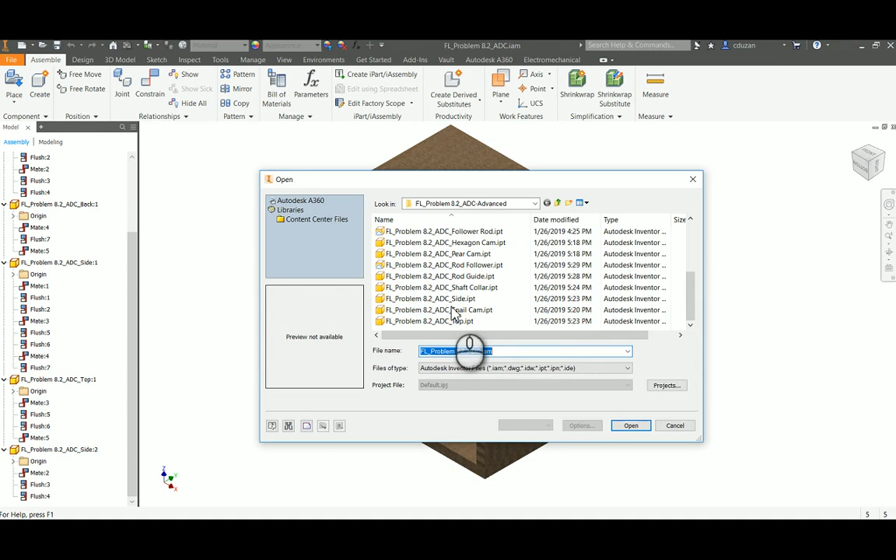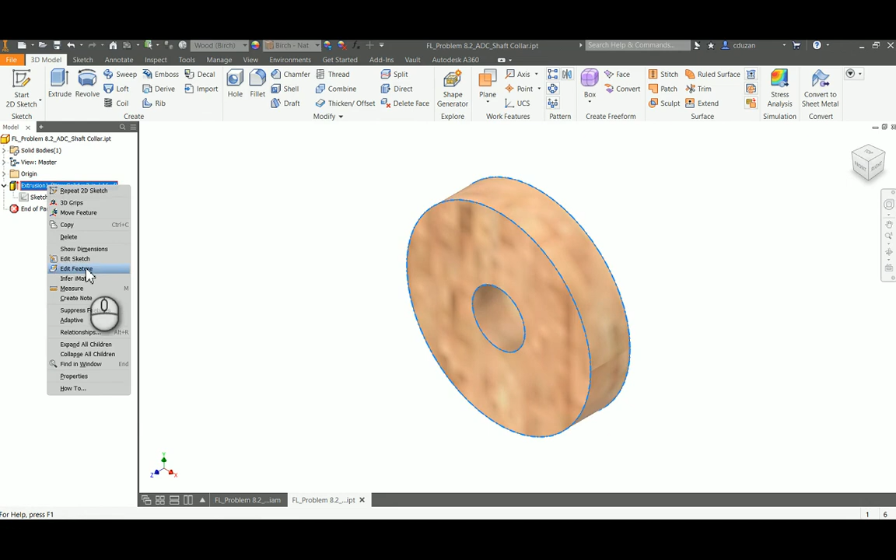So I'm going to go ahead and create the shaft collars first, or at least show you what those are going to look like. And they would look a lot like this. You can take a look at the sketch on this one. Looks like I created an outside diameter of 0.875. The inside diameter is 1/4, and that's going to allow the 1/4 inch round dowel rod to go through it. And the extrusion on that one would be a distance of 3/16, and then I just made that wood birch. That's all that shaft collar is going to be. So this time we're going to have to remember that calculation of 3/16.

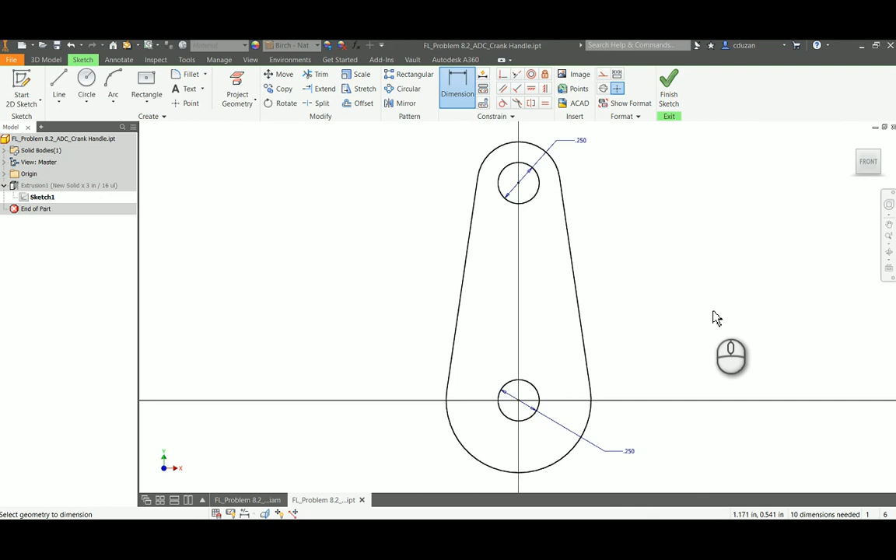And this time I want a true crank handle. So I'm going to take a look. Here's just one that I put together. If I take a look at the sketch on this one, we're going to see that these have a diameter of 0.25. We're going to use the 0.25 round dowel, obviously, for the axle. And then in this case, it's going to be the little peg that's going to go into the end, which is actually going to be part of the handle. What did I make this? Center point to center point, 1.3-ish, it looks like.

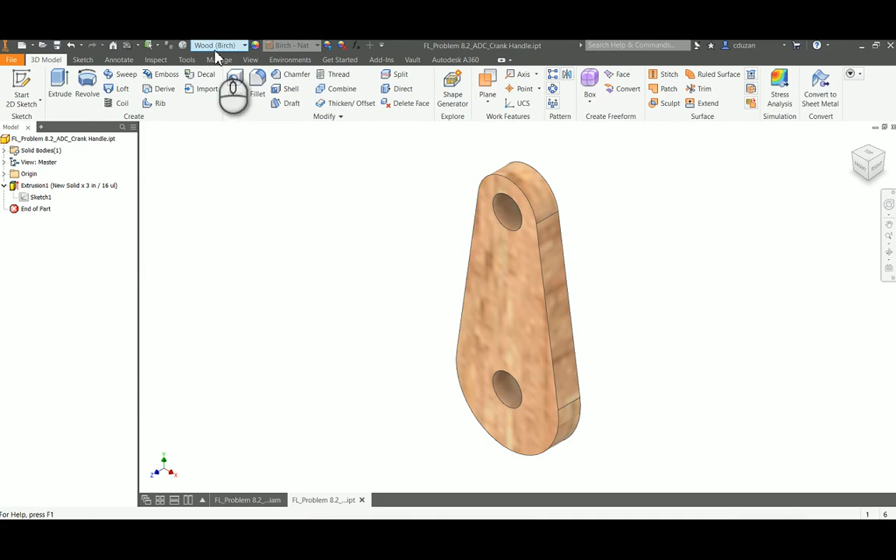Let's see. The outside on this is almost 1/2 inch diameter, and then this one, roughly 0.4 something on a diameter. Doesn't matter, I think I just eyeballed all this. Just know when I went to extrude, that was an extrusion of 3/16 in this case. Put that in as wood birch, okay, and I went out there and I just saved that IPT.

All right, so what this means for us is that we're going to have a shaft collar on both sides of this, okay, and we're going to have that crank handle on the other side of the shaft collar. All right, so we have to do a little bit of math here. We're going to come up here and measure this. Okay, we know that this distance is 5 inches.

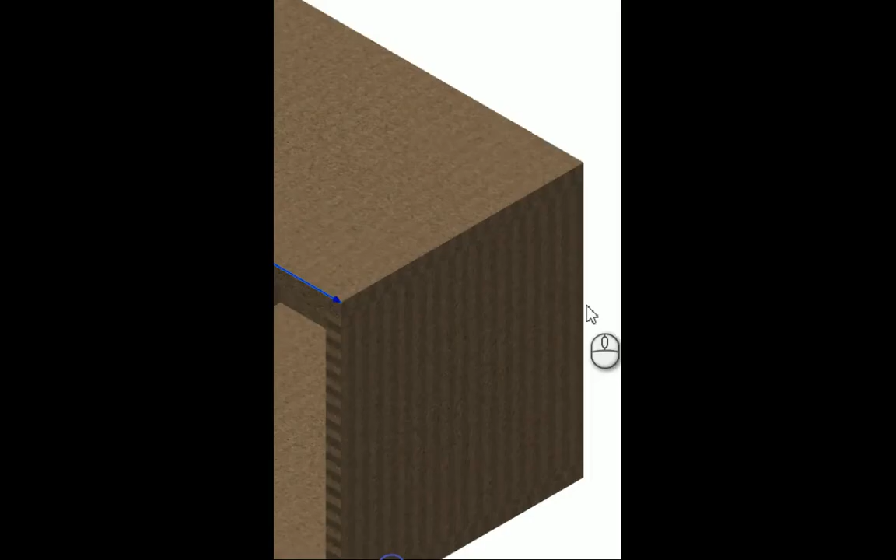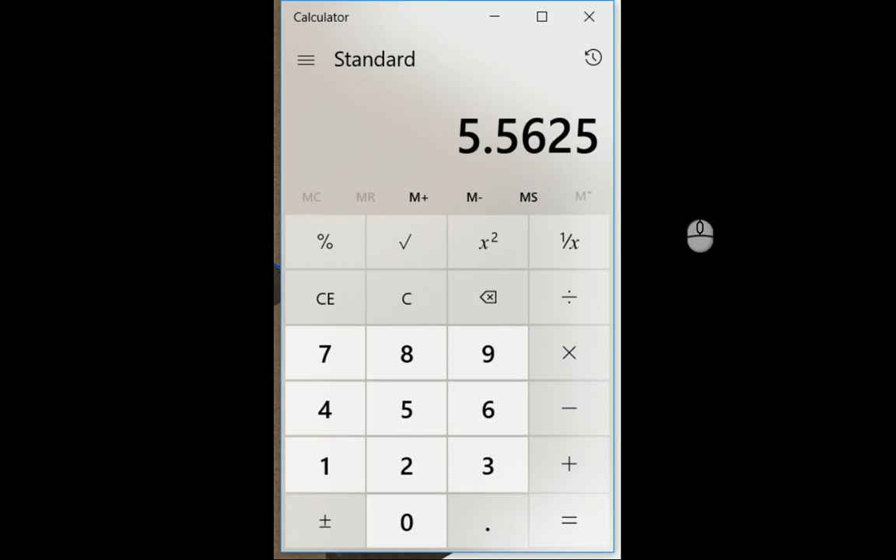We can go ahead and pull up the calculator and say, hey, what's this going to be? We're going to add that 0.1875 to it, another 0.1875 to it, and another 0.1875 to it. And we know that our axle has to be 5.5625. All right, I'm just writing that down because I'm going to forget it. So what that means for us is we have to go out there and create a new axle.

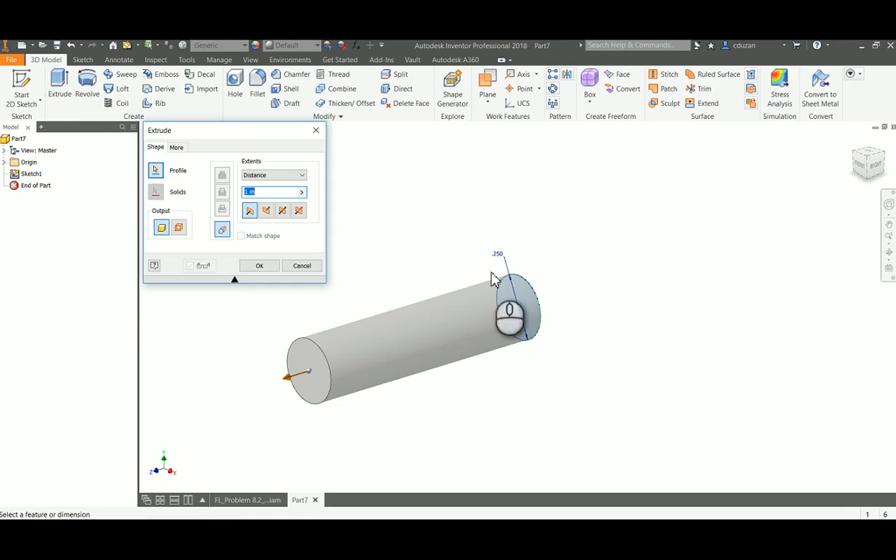So I'm going to come up here, go to my standard inch IPT and say create, start a 2D sketch, work on a work plane, draw your circle starting from the origin, and we're going to dimension that to be 0.25 for my diameter. I'm going to finish the sketch, do an extrusion, and if my math is correct, it should be 5.5625.

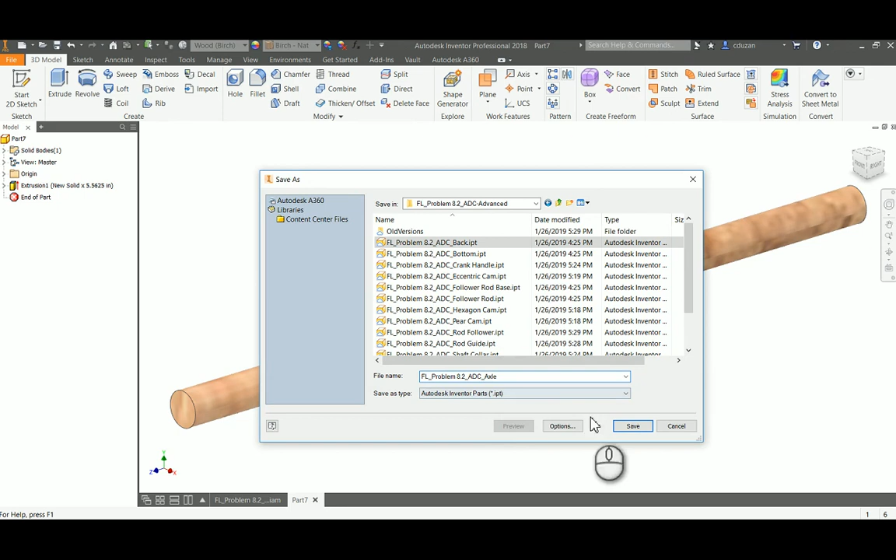Okay, now I can come up here and say, hey, I'd like for this to be wood birch. That's what dowel rod kind of looks like. And I'm going to go ahead and do a save, and I'm going to call this one my axle. All right, so I got that one saved. That is done.

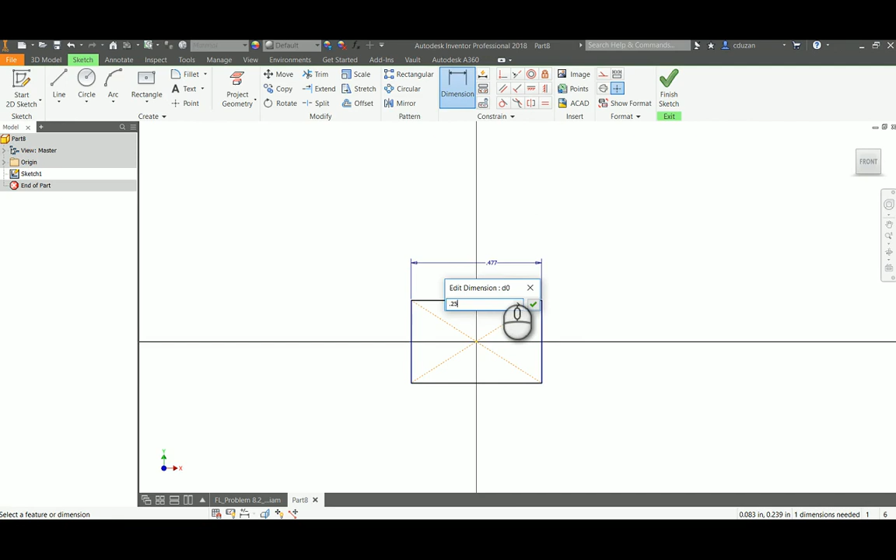All right, so my follower rods, in this case, are going to be the square dowels. So I'm going to have to come out here and create a new IPT. I'm going to start a 2D sketch, go to the work plane I want to work on, use 2-point center this time, go to dimension, and we're going to make this 0.25 by 0.25, and finish the sketch.

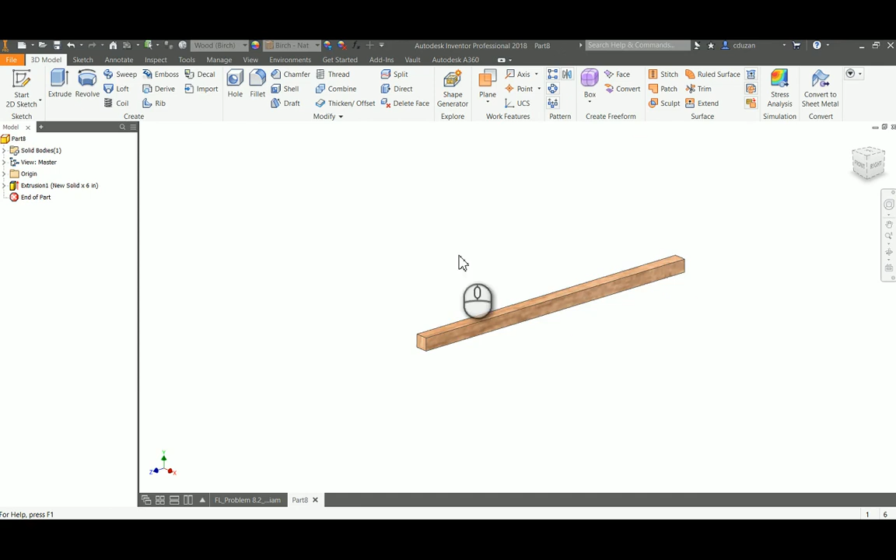We're going to do an extrude, and I said last time those were 6 inches in length. We'll go ahead and just go with that, and we'll turn this to wood birch, just like so. I'm going to do a save as, and this time, this is going to be my follower. Okay, so I have my follower rod saved.

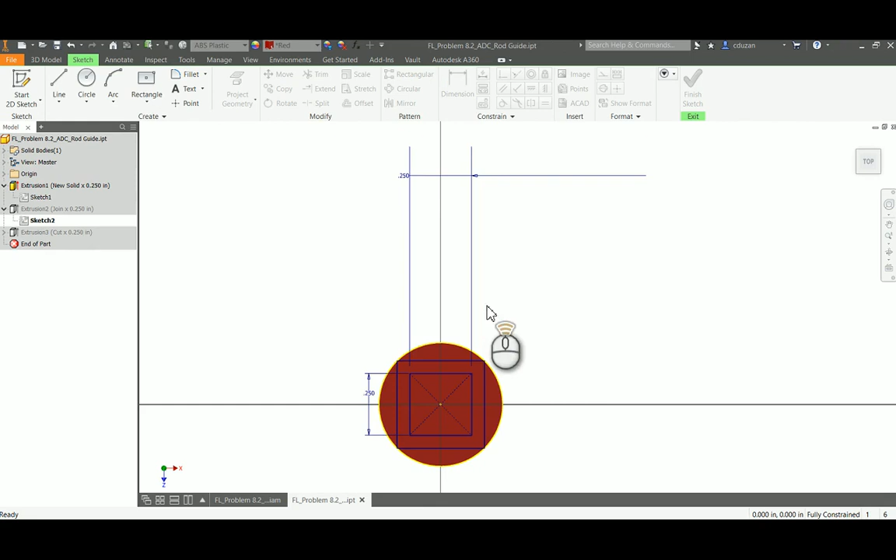So if you kind of think about it, like I said before, we're going to have to make some sort of a bushing, and we're going to call this the follower rod guide. I'm just going to show you real quick what that looks like. Where is my rod guide? There it is. Here's something I just put together. Simple cylinder, and we have this square on the inside. If we take a look at this extrusion at the top, that square is 0.25 by 0.25, and that's cut all the way down through.

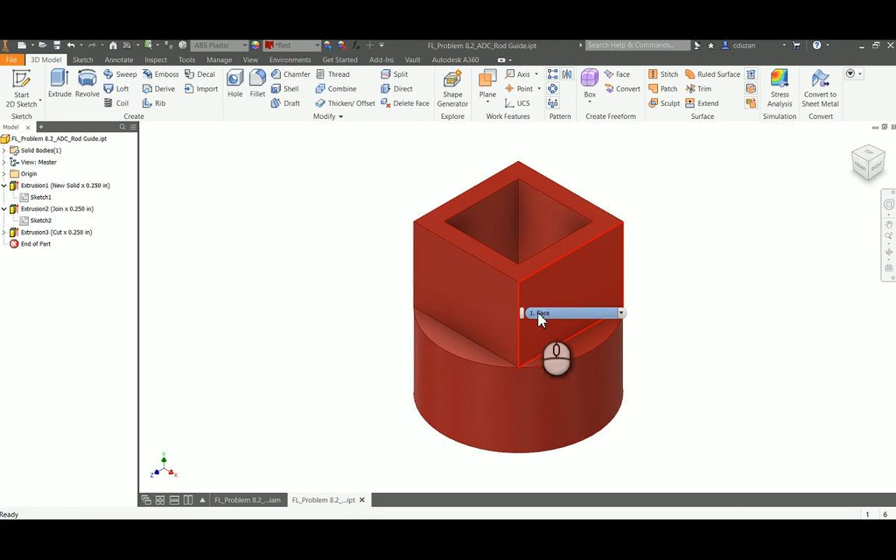The biggest thing we have to know is what this diameter is. If we take a look at this sketch, in this case it's a 1/2 inch diameter. I need to know that because I have to drill holes in the top part that are going to be this diameter, which is 0.5. Just wanted you to be able to see it. This is easily something that can be 3D printed. In this session, you're probably going to be getting these. Very simple part. You can 3D print a bunch of those.

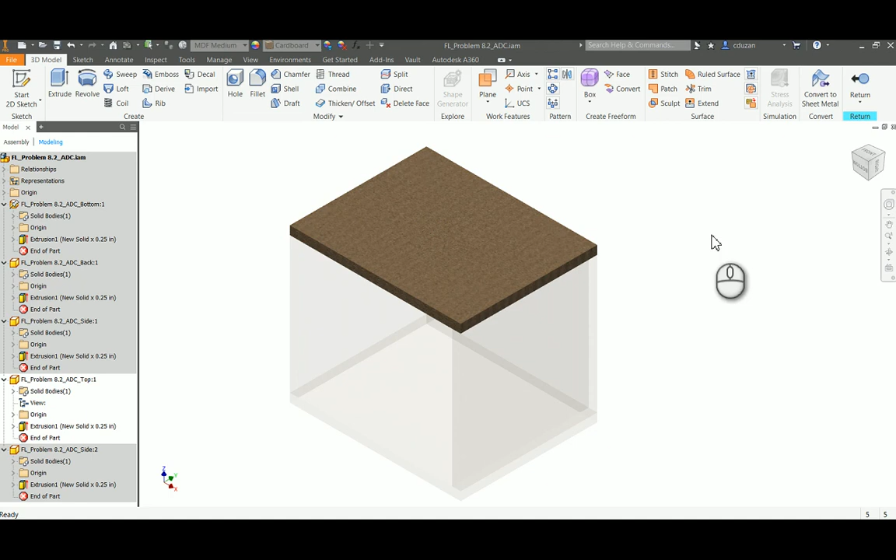Okay, so I think we are basically ready. This time I'm going to work directly through the IAM to make any changes I need. I'm going to start a 2D sketch. Actually, no, this time we're going to do something a little bit different. Last time I was creating a sketch, dropping that point in there, telling it where it needed to go, and then I went to the hole feature.

But this time, let's just go directly through the hole feature. I'm going to go out there and pick on the surface of this, and come out here to my reference edge. Now, last time, we made these 1 1/4 inches from the sides. So I've established that, and I'm going to come over here to this reference edge and say I want that to be 2 inches.

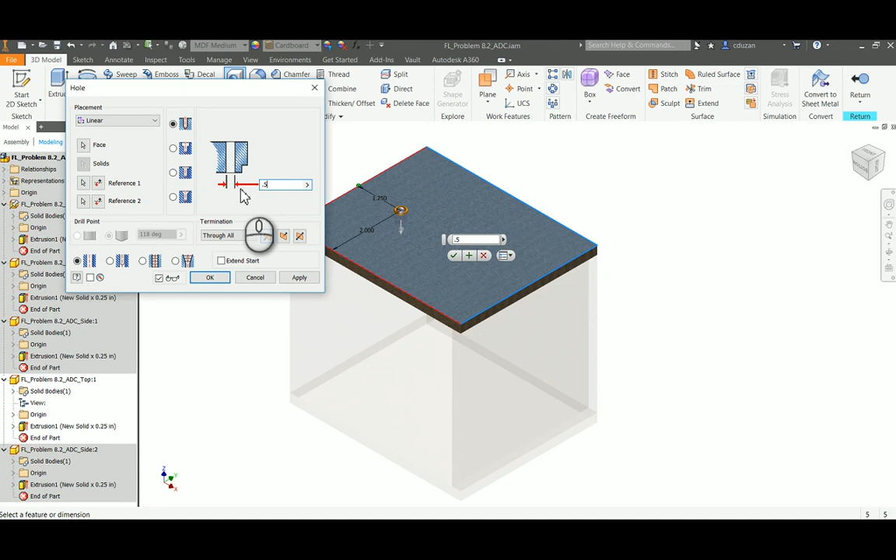In this case, I was just showing you that follower rod guide, which shows a 1/2 inch diameter for that cylindrical base on it. So I'm going to say I want this to be 0.5, and that's going to be a standard hole cut all the way through. I'll go ahead and say okay.

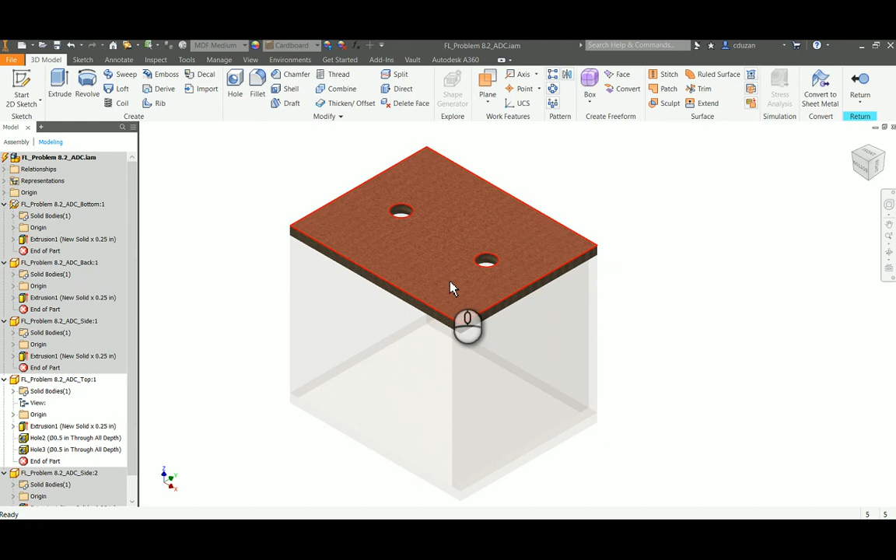I'm going to repeat the process again. Come out here, pick on the surface I want to go to, come to my first reference edge that is 2 inches away. My second reference edge is going to be this one, and that needs to be 1.25 away. Diameter 0.5, standard hole, cut all the way through, and I'll go ahead and say okay. So I've now taken care of the holes for the top IPT. I'm going to return back to my assembly.

Now I need to go ahead and get my hole drilled in here for the 1/4 inch diameter axle that's going to be running through this. So let's just take care of that. I'm going to double click on this side IPT, go to my hole feature, and place that hole.

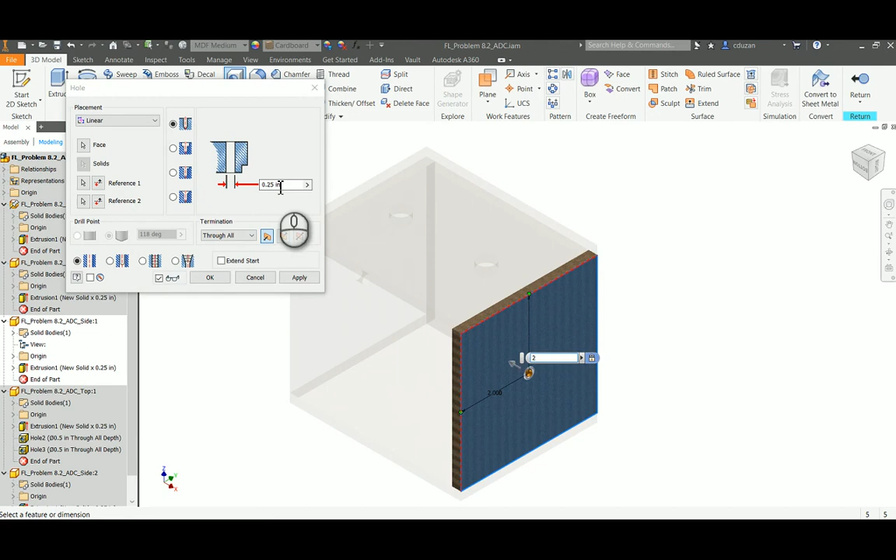I know my sides are 4x4, so I can go ahead and reference this edge, and that needs to be 2 inches. I can reference this edge, and that needs to be 2 inches. In this case, it's going to be a 1/4 inch diameter hole. Standard hole, drill all the way through, and I say okay.

I'm going to return back to the assembly. Nice thing is, since the side was a duplicate, any changes I make to one side IPT is going to be reflected on the other.

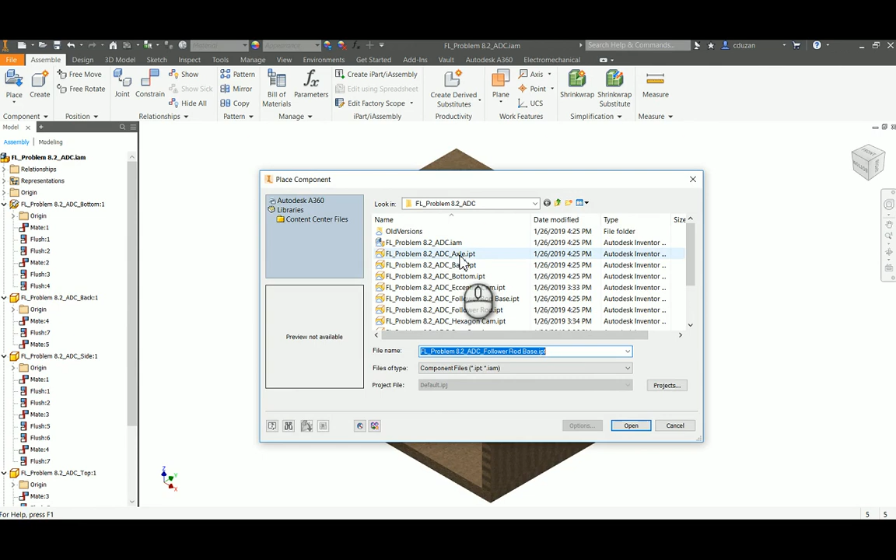So just like with our basic assembly we did a little bit ago, now I can go ahead and begin dropping in parts I'm going to need. I'm going to come out here and go to place, making sure I'm in the right place here - I had 2 different folders. All right, there's my new axle. I'm going to go ahead and place that in. We're only going to need one of those.

Let's see, we need some follower rods. Let's go out there and place in our follower rods. Okay, there's my first one and my second one. So I got that taken care of.

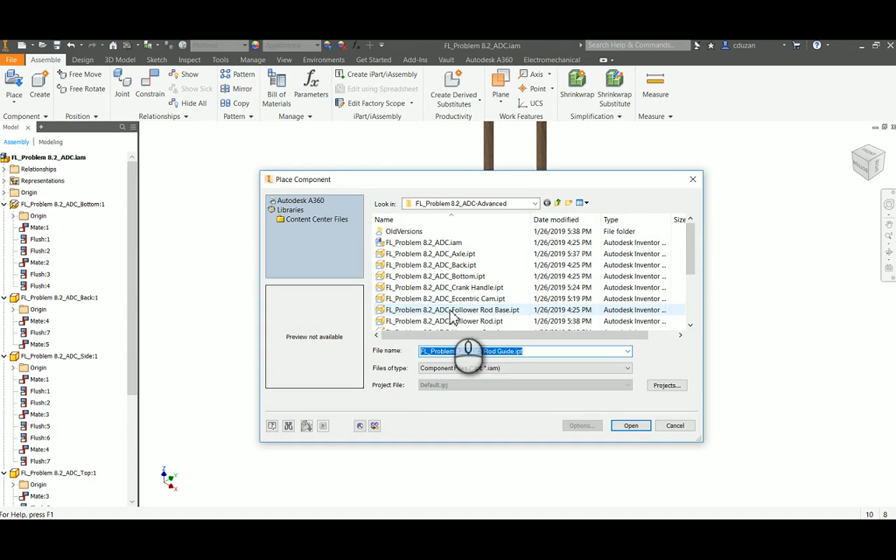And I know I am going to need my follower rod guide, which is what I was just showing you a little bit ago - these are just those bushings. And I know I'm going to need 2 shaft collars, which I was showing you a little bit ago. And I know I'm also going to need my crank handle. All right, so everything's starting to be placed.

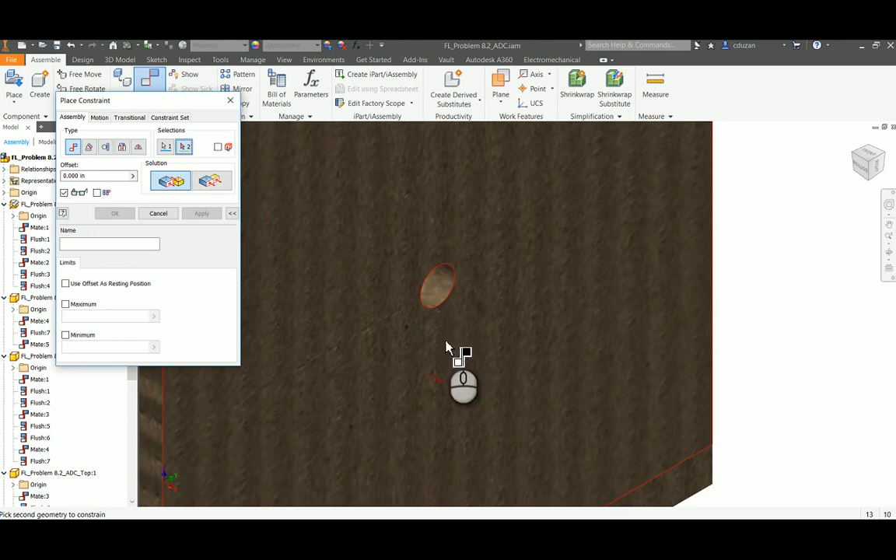All right, so simple enough. Let's get our axle in. So we come out here to constrain, and we're going to use the mate type of constraint. We'll use the mate solution, come out here and find the axis that runs through that round dowel. Now we're going to go to the inside of this hole and find that connection between the 2 axes. When we do that, we'll see that this thing is able to slide through this, going both ways.

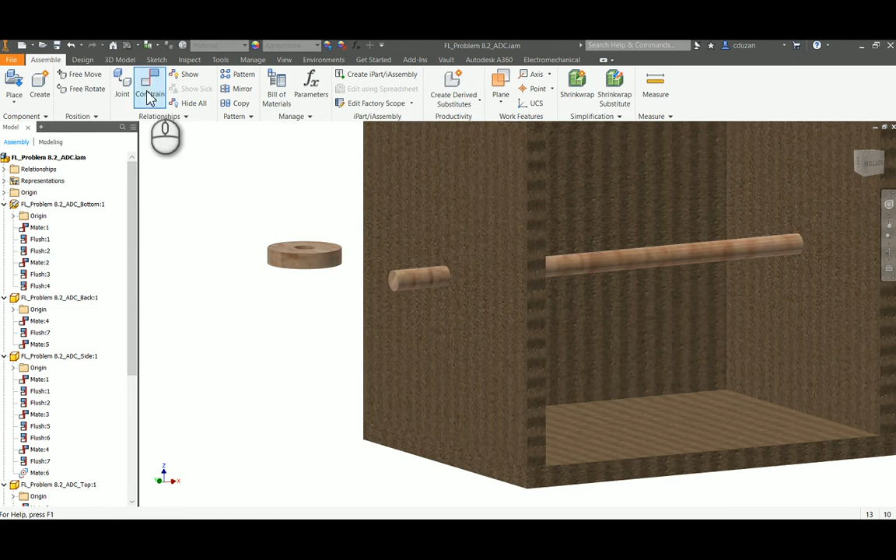Now I need to add my shaft collar on this side. Let's flip it over this way - I'm right-handed, so I want to crank it with my right hand. Here we go. So we're going to say constrain, and this time let's switch it up. Let's go out to insert constraint - we'd like to insert this edge here and make contact with this edge here. If it does not look right, just know you have your solutions. The first solution we are currently using is opposed.

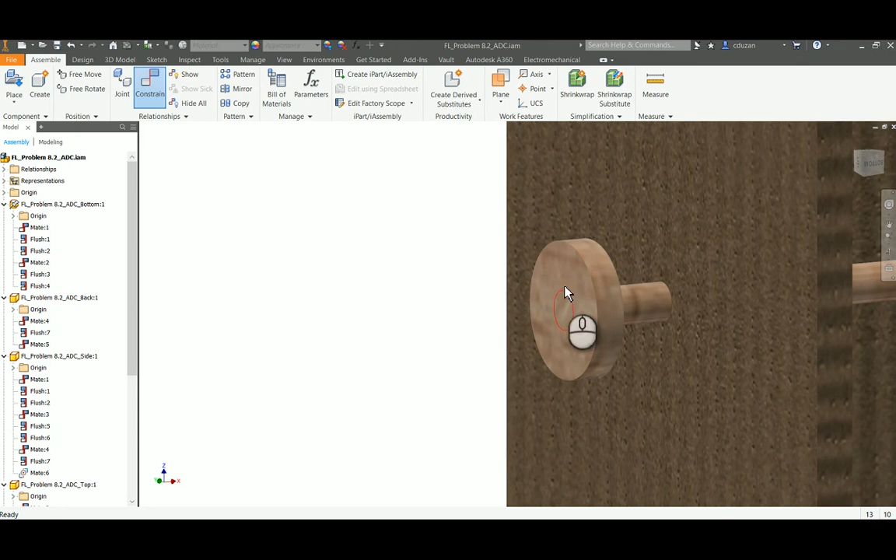If it doesn't look right, simply go to aligned and hit apply. Now we're going to be seeing that those two are working just fine together. Now, the problem we're going to have is that this is spinning independently from the axle.

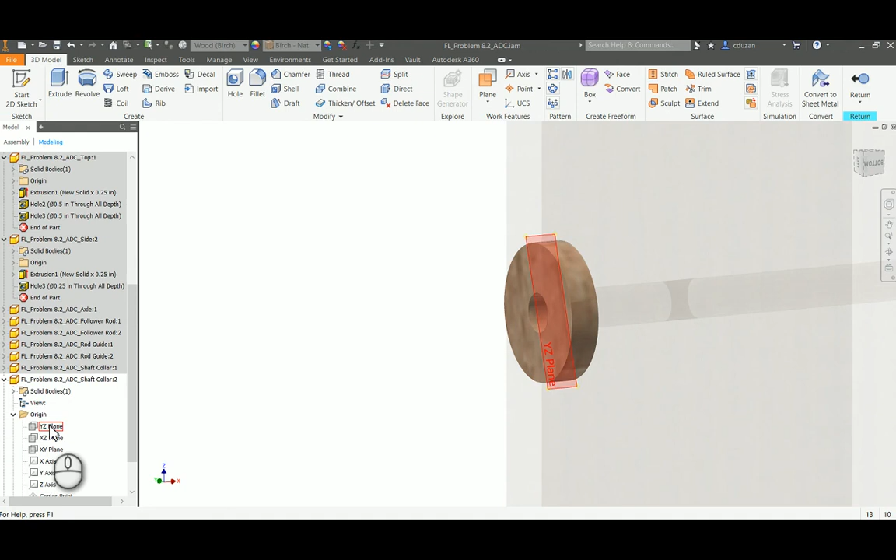So now this is going to take a little bit of work, turning on some work planes that we can use to constrain those. I'm going to double click on the shaft collar, go into my origin folder, and find a shaft collar work plane that I can work with. This one would work just fine. I'll pick on visibility to turn that on and return back to the assembly.

Now I'm going to double click on the axle and go underneath the origin folder for the axle to find a plane running the long way down the axle. This one works great. I'll turn the visibility on and once again return back to the assembly.

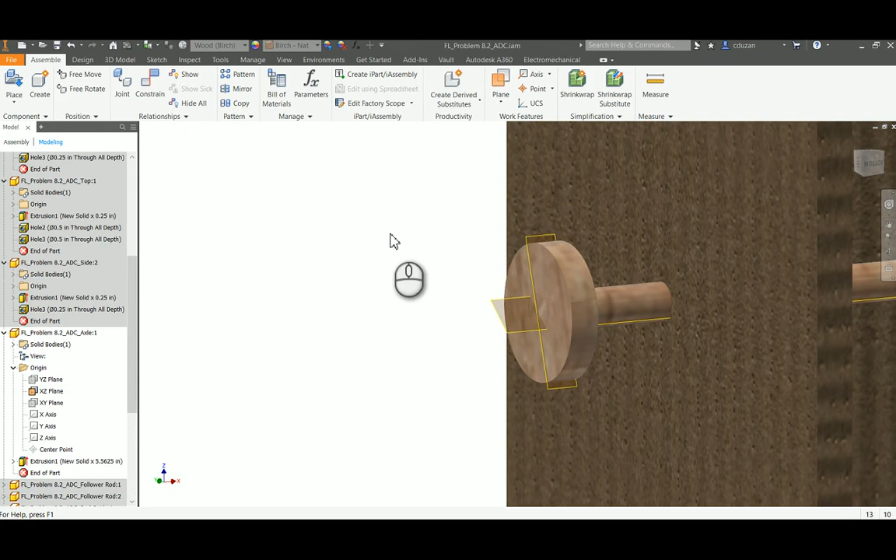Since I want these work planes to be working together, I'm going to go to constrain and use either mate or flush. It doesn't matter. If I pick one work plane and then the other, you'll see how those align. I'll go ahead and hit apply and cancel. Now when I spin this, you can see how those are working together.

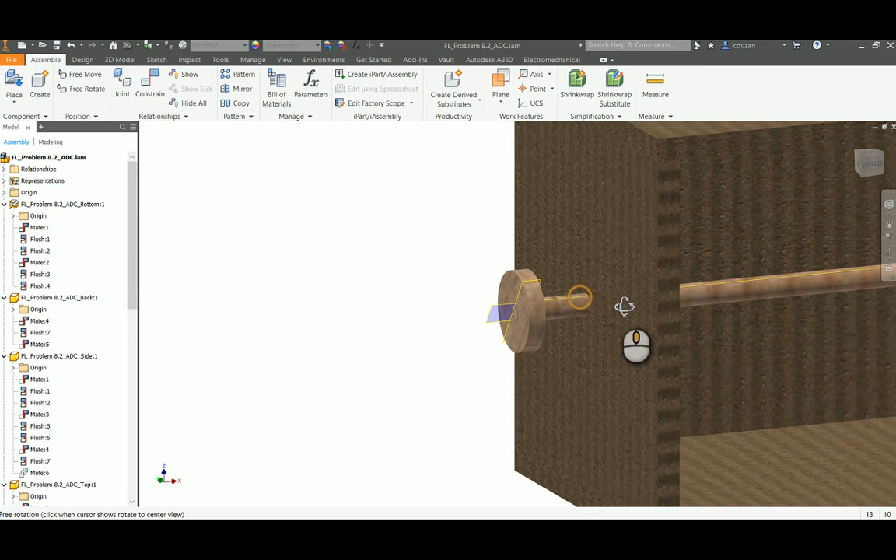But the thing is, I need this to come all the way to this surface. So that's going to be using constrain and mate. I'm going to pick the back face of our shaft collar and say I want that to make contact with this surface here. I'll hit apply and cancel. So this guy is not able to move off of here, and it is able to spin on that axis. We're looking pretty good.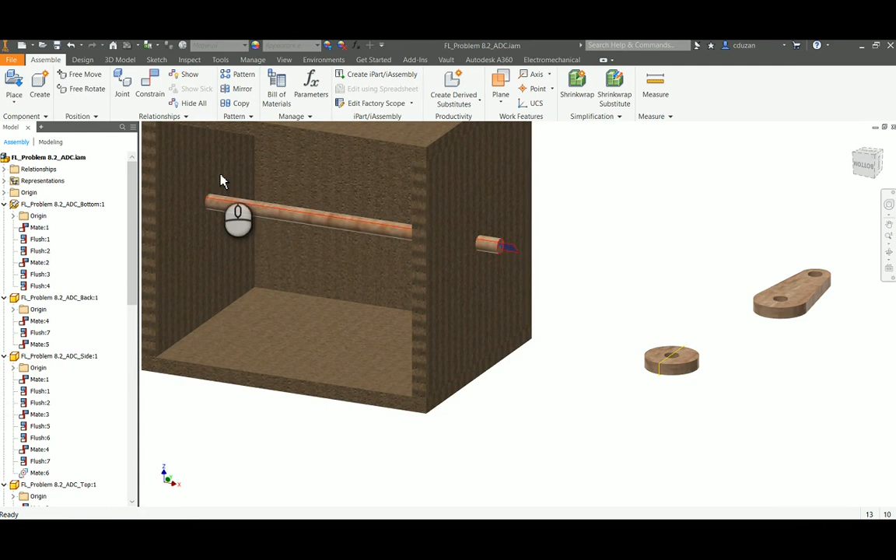I do want my shaft collar to come on over here, so I'm going to do a constrain, an insert in this case, and say I want this face here, that edge, to make contact with this edge. I can check the solution - oh, that's not right at all, so I want this to be opposed in this case. I'll go ahead and hit apply. Just like last time, we can see how the shaft collar is working independently from the axle.

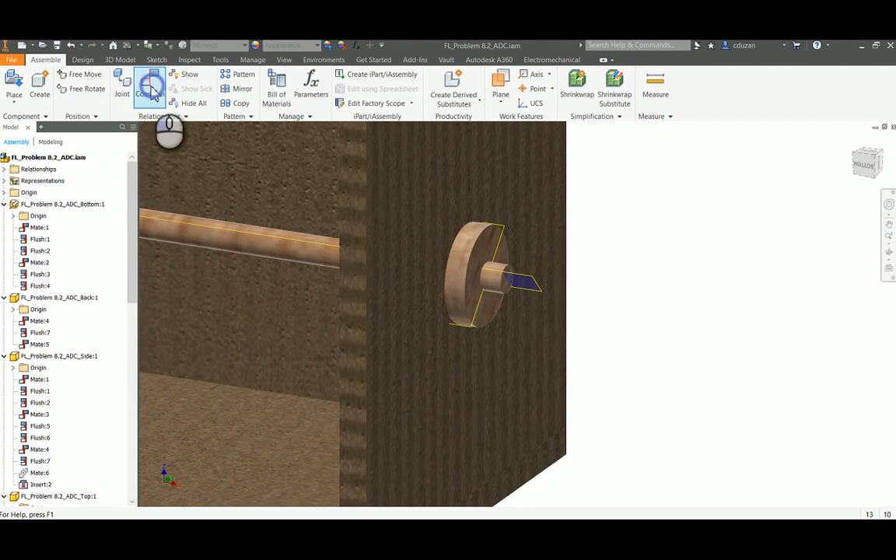So in this case, constrain, we're going to do either a mate or a flush, it doesn't matter. Go ahead and hit apply. Now we're going to see that these are working together and spinning in the same direction together.

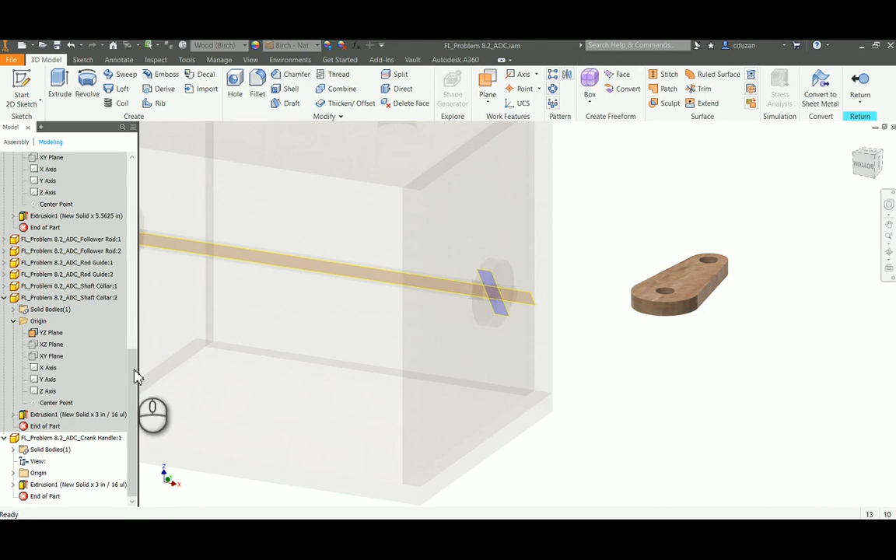So I have my crank handle - he needs to come on and join this party. Before I do this, I need a work plane that goes down through the center of this. So I'm going to double click on my crank handle, go to my origin folder, and find a plane that goes right through it, just like that. I'll turn the visibility on and return back to the assembly.

Now here's where I can come out and constrain this axis, using the mate constraint, mate solution, saying I want that axis to be working along with this axis. I'll go ahead and hit apply. Now I can see that this is working independently from the other one.

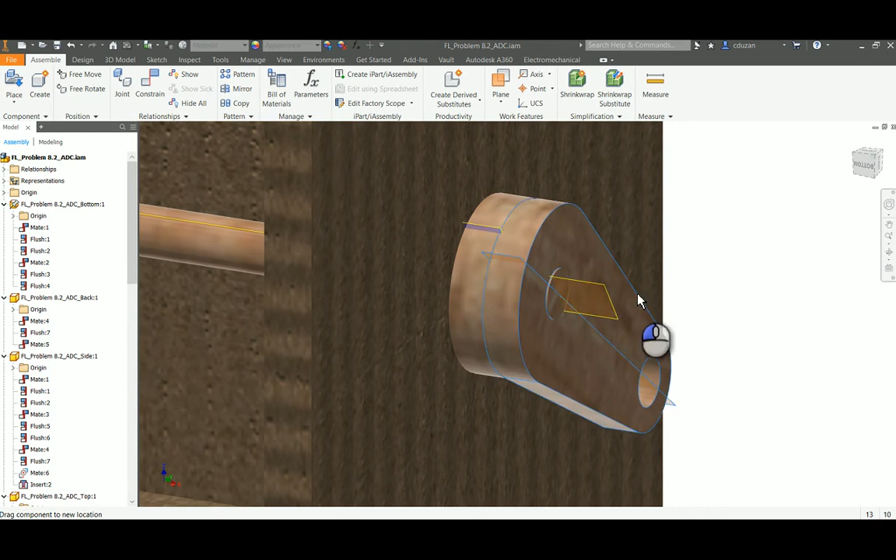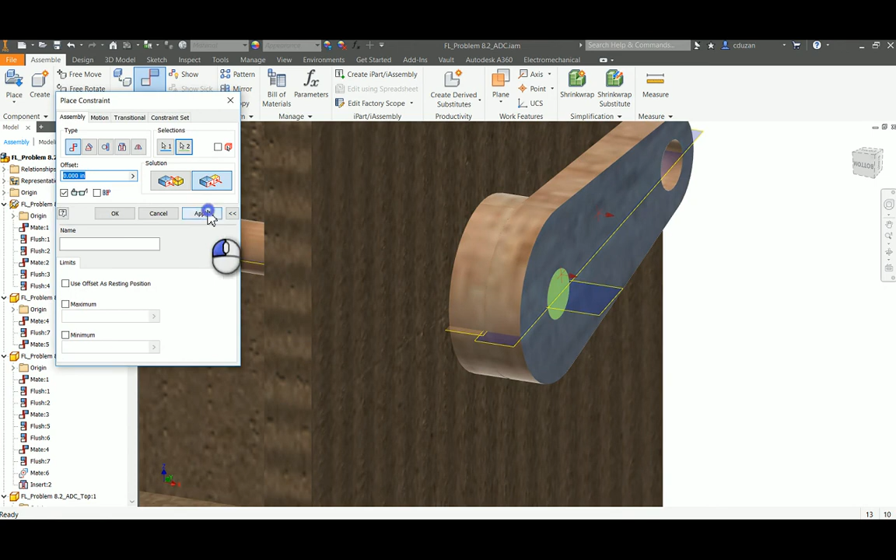So I can either do a mate or a flush - I'll say this plane and this plane need to be working together. I can see those are now working together. The problem is that this is sliding off, and my measurements are correct, I can already tell. So if I come out and do a flush between this face and this face, now I can see that's all one package, and that's going to work just great.

So I have my crank handle, my axle, everything is where it needs to be. It is able to rotate. We're doing pretty good.

Okay, so I need my follower rods to go down through these holes, but before that happens, I need to install these rod guides. All right, so let's see how we're going to do that. Let's go out to constrain.

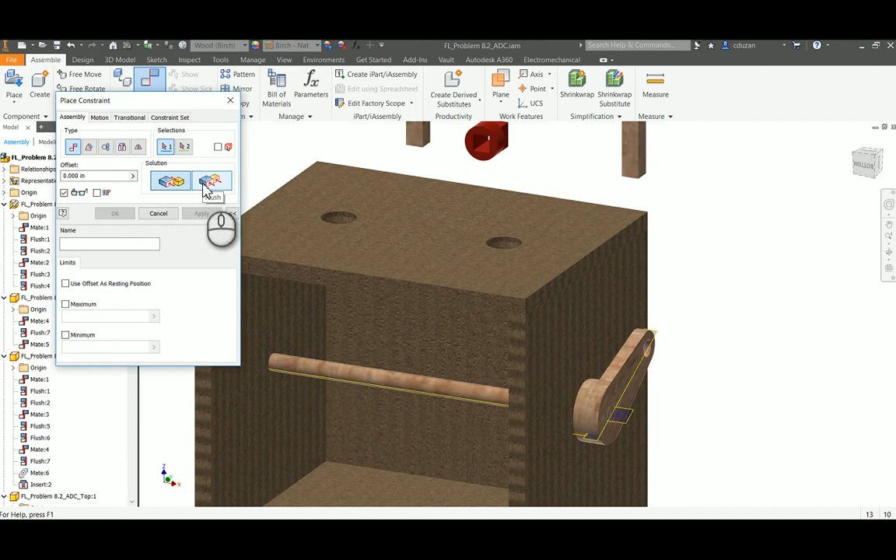Okay, we're going to be using the mate type of constraint with the mate solution. Come here to the outside of this rod guide. Okay, find that axis, and let's go ahead and pick to the inside of the hole. Okay, and yeah, that'll work just fine. Let's go ahead and hit apply and cancel out.

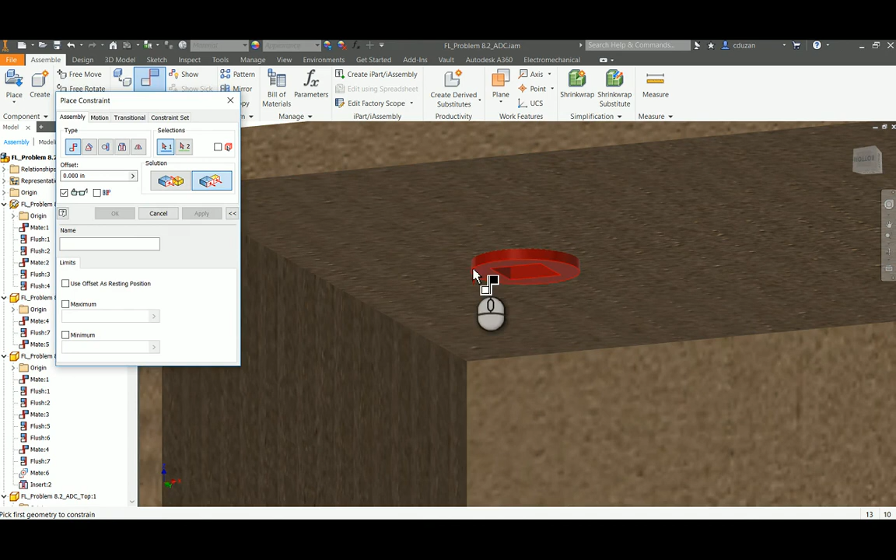The problem is that I want this guy to be down underneath. All right, so let's see if we can get this to work for us. It might get a little fussy. I'm going to go to constraint and say flush, and I want this face to be flush with this face. Okay, now that has gone on in. Now the problem is this is rotating. Okay, that is just fine. I'm going to show you something here in a little bit. We can get all those to align.

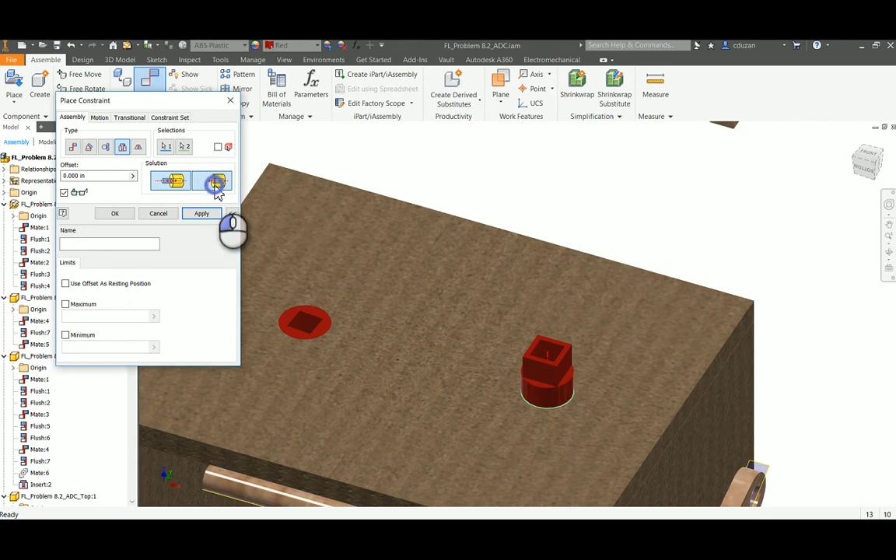That's just fine. Hey, for the second one, let's go ahead and let's try using insert. Let's go to constrain, let's go to insert, and we're going to say we want this to be inserted into here. And I don't like how that is looking, so if I just hit the second solution, which is aligned, and hit apply and OK, all right, this guy is going to do exactly what we just did last time. The nice thing is, the second time around, we actually cut out a step.

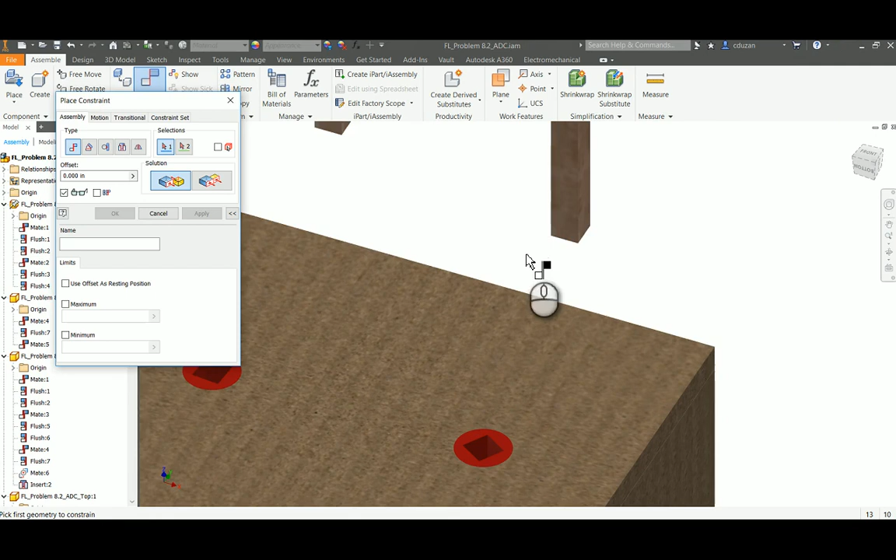All right. So we have those in. Now we need to go ahead and make sure that our follower rods are connected into those rod guides. So I'm going to go ahead and constrain this face to just one of these flat faces on the inside. Go ahead and hit apply. And since I have that one connected over on the other side, I'm going to flip this over if I can get to it. There we go.

And I'm going to say I want that to mate to this face here. Go ahead and hit apply. All right, so that fits just perfectly in. You can see that this is also going to be able to rotate. Okay, still not a problem because we'll fix that in just a little bit.

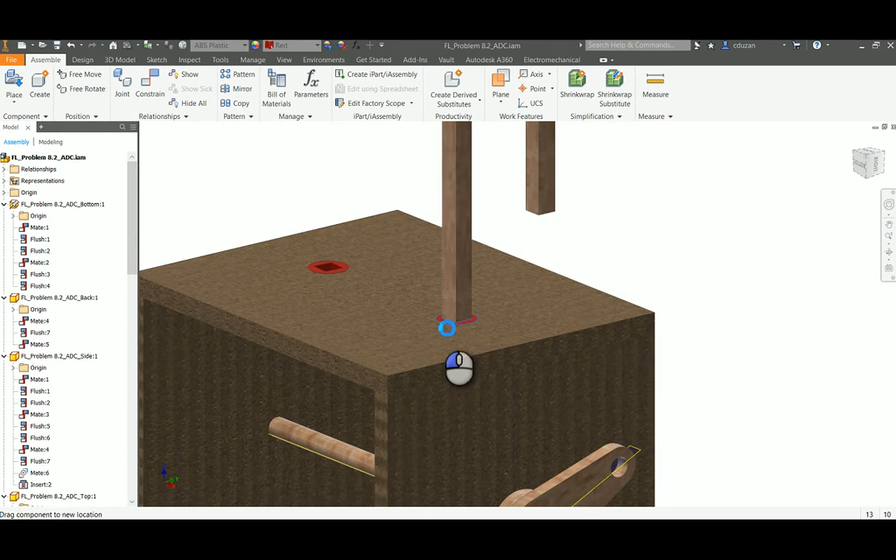I'm going to do the same exact thing I did before. I'm going to go ahead and constrain one of these faces to the inside of one of these faces. Hit apply. I can go ahead and scoot this on over. Now I can go ahead and take a look at this, and I can constrain this face to this face. Go ahead and hit apply, and now this is going to be able to go up and down. All right, so now we are ready for cams.

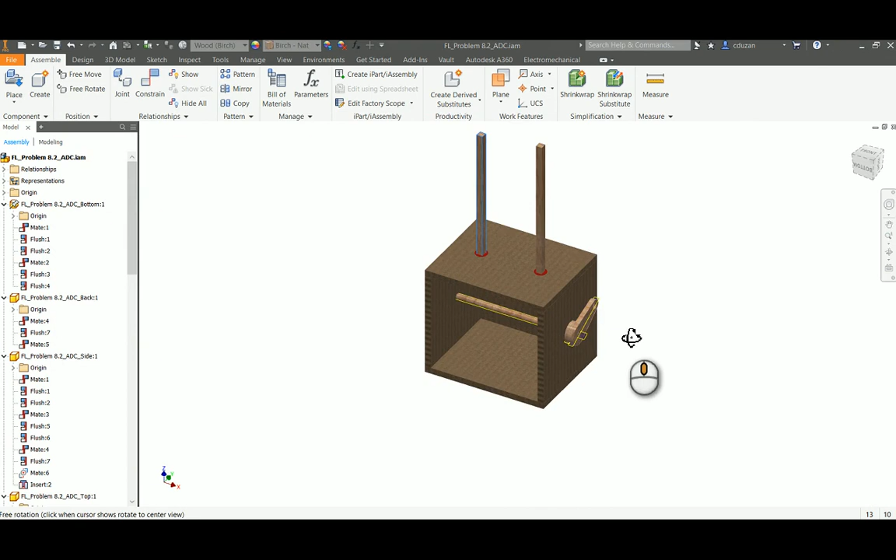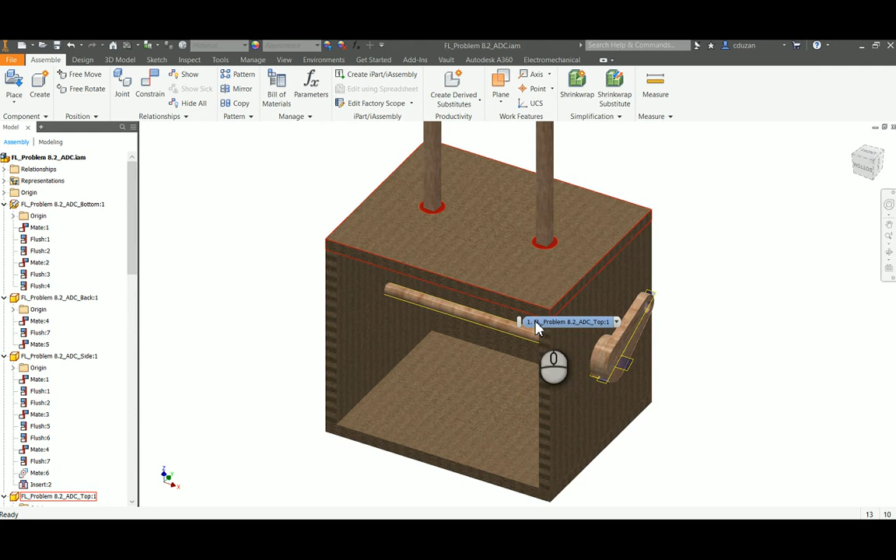All right, so just know at this point in time, this is one of the sessions before parametric constraints and equations with cam design. You're not going to have these ready to go yet. You actually are not going to have these built. So just know right here where you're seeing the video, down below, you're going to see a folder where you can download, a button where you can download the files that you're about ready to see.

In this case, the cams are going to look a little bit different than last time. Okay, remember the axle that we have is round, it is not square. All right, so I'm going to go out here and place we're going to use the eccentric cam just like last time. And we're going to also place, let's do a pear cam this time. Actually, I think it was a pear cam last time too, that's okay.

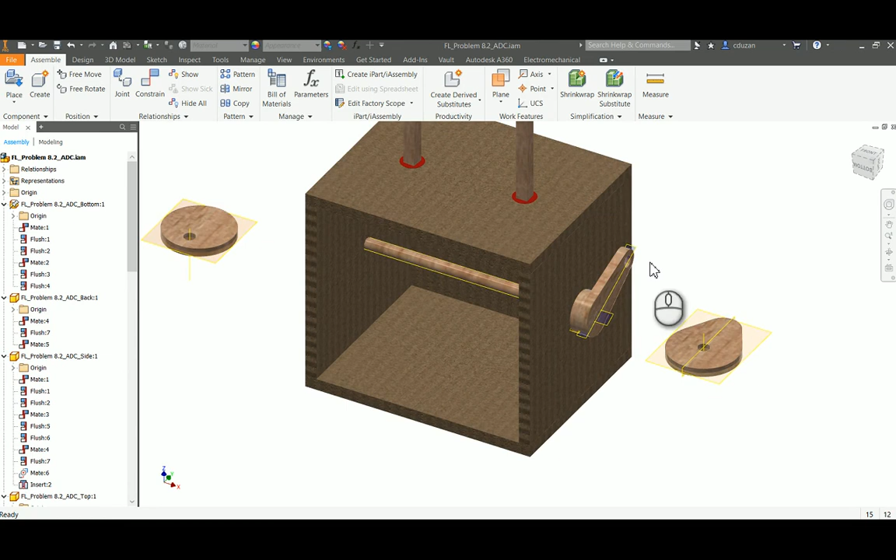All right, so let's go ahead now and let's constrain the axis of our arbor hole of our cam to the axis of our axle. Let's go ahead and hit apply, and we're going to see that this is able to slide back and forth.

Okay, so when the cams are created, and if you do this properly, we're going to see a work plane is going right down the center of that. Okay, and

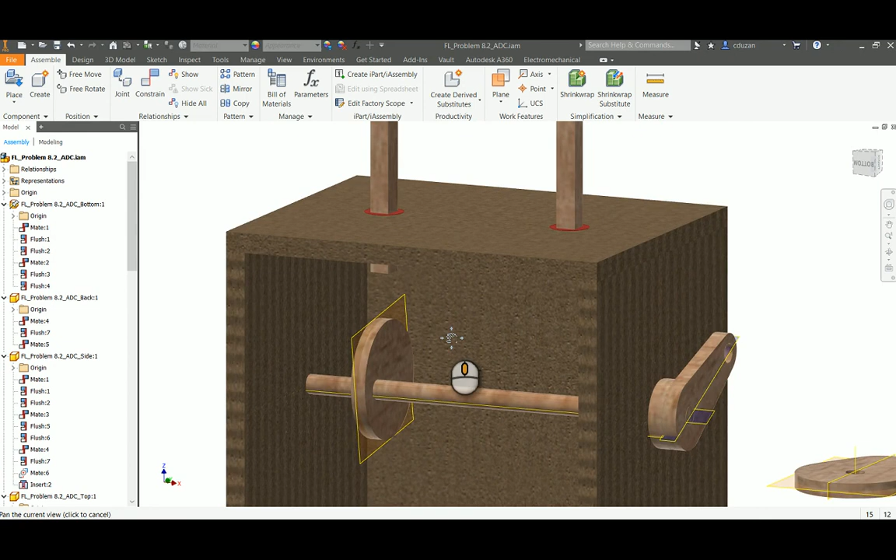how easy would it be just to come back to our follower rod, double click on it, and say, hey, Mr. Follower Rod, let me see your origin folder, and let's find a plane that's rolling right down the center of that. I'm going to go ahead and turn that on. Okay, I'm going to go ahead and hit return.

All right, now, depending on how you put the other one in, okay, that other plane, could be it could be going the other way. So just know, you don't have to delete that and start all over again.

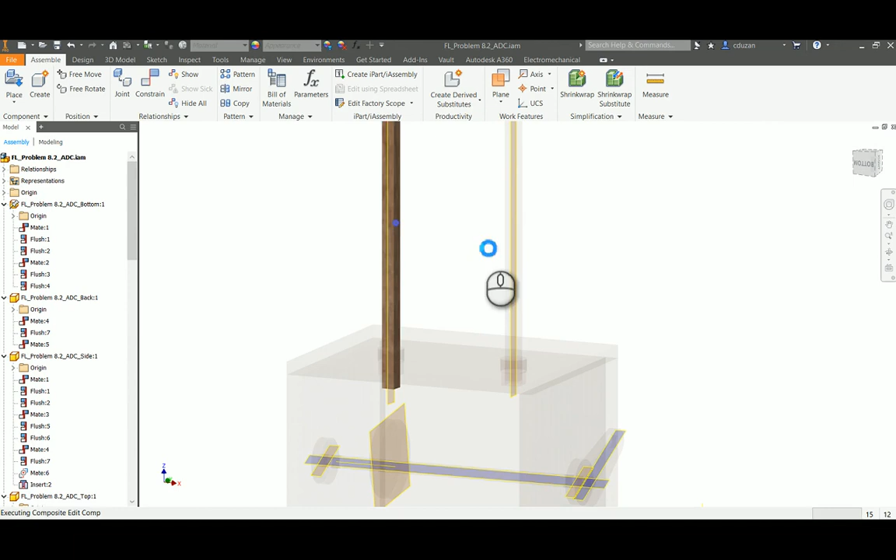You could come down here, go into your origin folder, okay, and you could turn on both of these at the same time. Okay, just like so. So it is going to be sort of a cross area. It can get a little jumbled up with work planes. Just know you can turn those on and off just by going into the IPT.

Okay, so now we are set and ready to go. Now watch how this works. We're going to go to Constraint and go to Flush, and I'm going to say I want this work plane to be flushed with this work plane. I'm going to go ahead and hit Apply and cancel out of it.

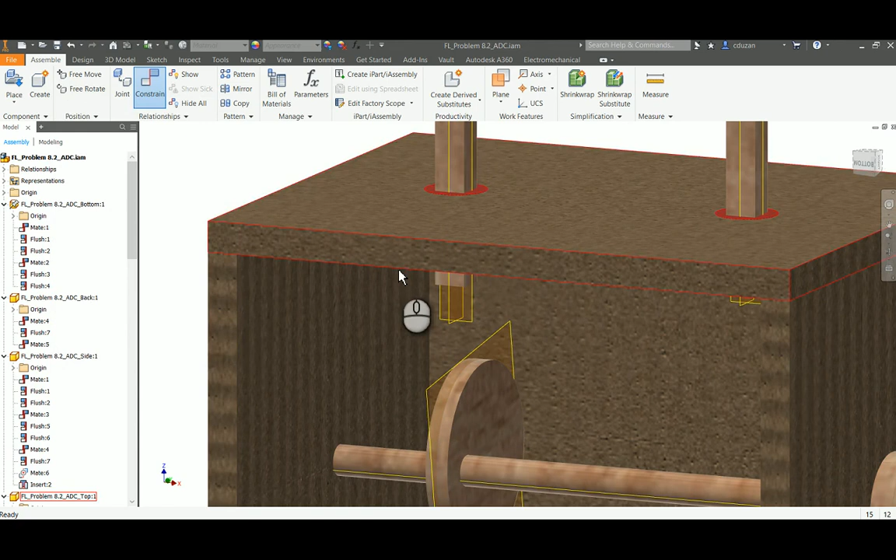We take a look at the front of this, and we can see that cam is not able to move back and forth. Okay, and when we did that, here's kind of the cool thing, is that we have now fully constrained this rod guide. All right, pretty cool, right? All right, let's do the same thing for the other one.

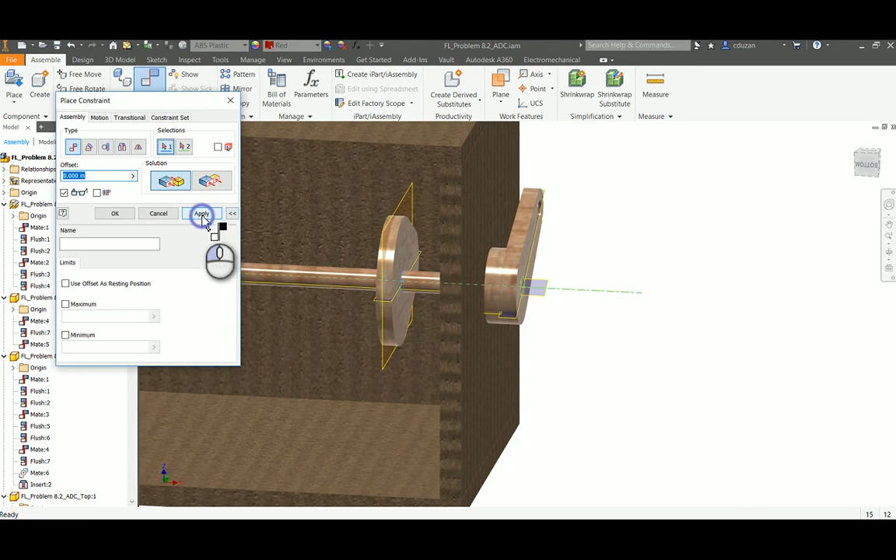Let's go out there and go to Constraint, and let's go ahead and mate this axis to this axis. Looking good. We're going to go ahead and hit Apply and Cancel. And now we're going to do a flush between this work plane and this work plane. I'm going to go ahead and hit Apply and Cancel.

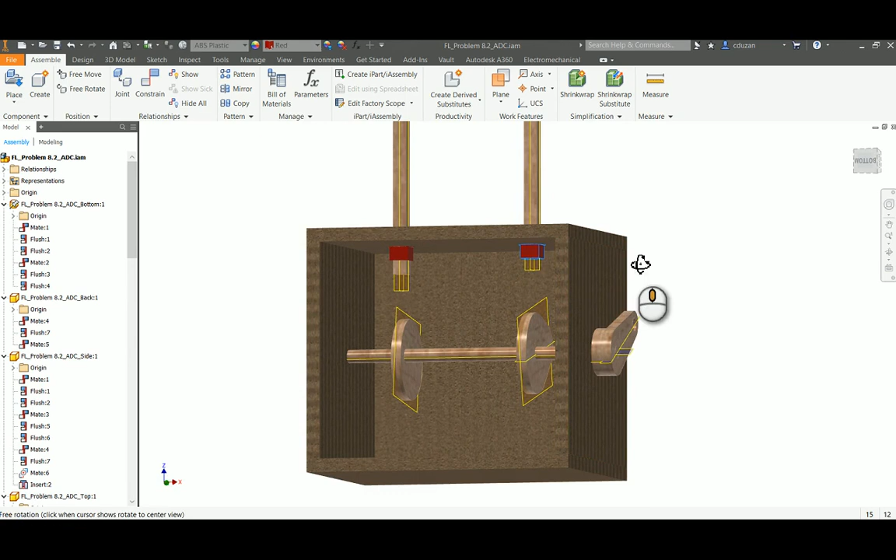All right, once again, we're going to look at this face. And we can see that that guy is not able to slide down the axle. And when we do that, we have the magic happening here with the rod guide. It's not able to spin anymore. All right, so I'm going to go ahead and just pull this down a little bit.

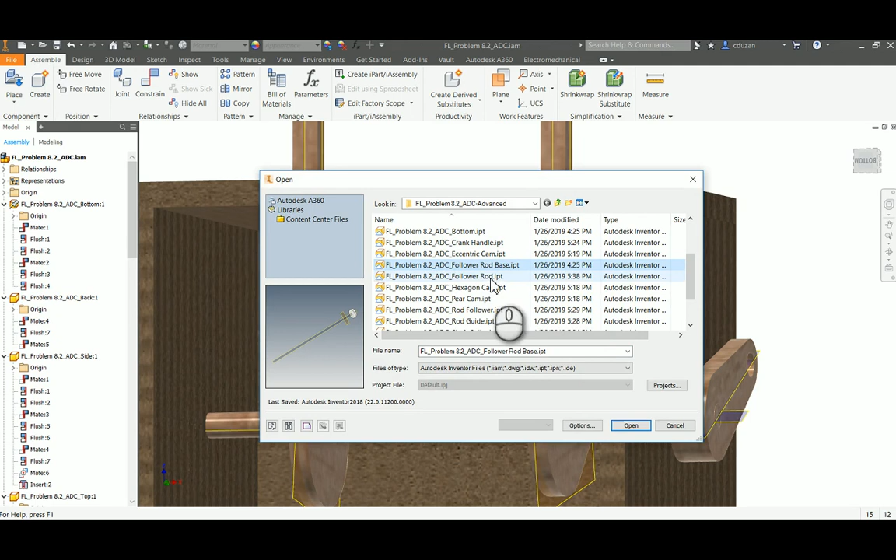So in this case, you're going to need some sort of follower rod base. And if you watched the last video from the basic one, things got a little bit goofy when it came to that. So this time, I'm going to let you see what I've done with this. So let's see, what did I call it? Oh, rod follower, there we go. So this is what the rod follower looks like this time.

On the bottom of this, you're going to see how I have included that arc that has been extruded. It's a symmetrical extrusion. In reality, are you really going to need this when you go to do the actual build, the physical prototyping? No. However, Inventor can get a little bit fussy when it comes to transitional constraints, so you are going to need this. All right, so just wanted you to see this.

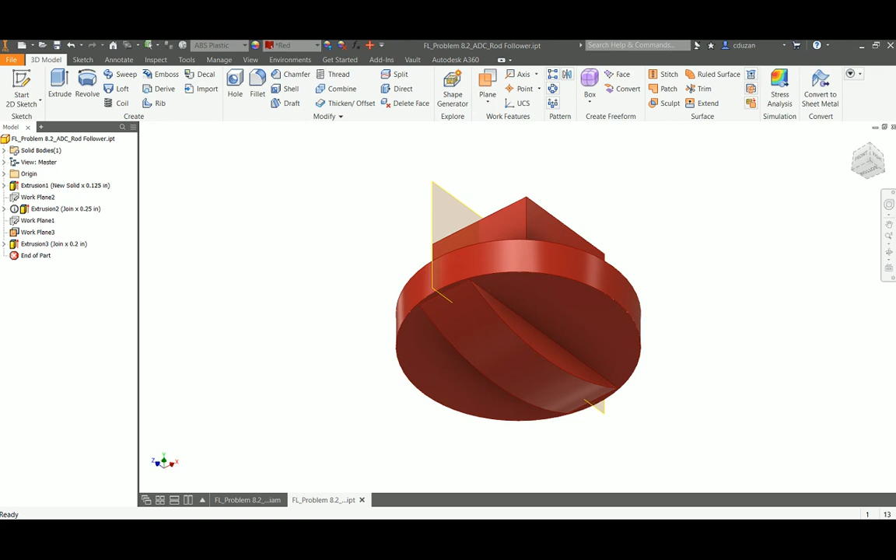Pretty simple stuff. So I'm going to go ahead and close out of the IPT and place that rod follower. I'm going to need 2 of those. I'm going to say OK. And now it looks like they're coming in a little bit goofy, so I'm going to go to free rotate, and I can pick that guy. Let's see if I can do a little free orbit and constrained orbit within that globe. Kind of nudge it in the right direction. There we go. Looks good.

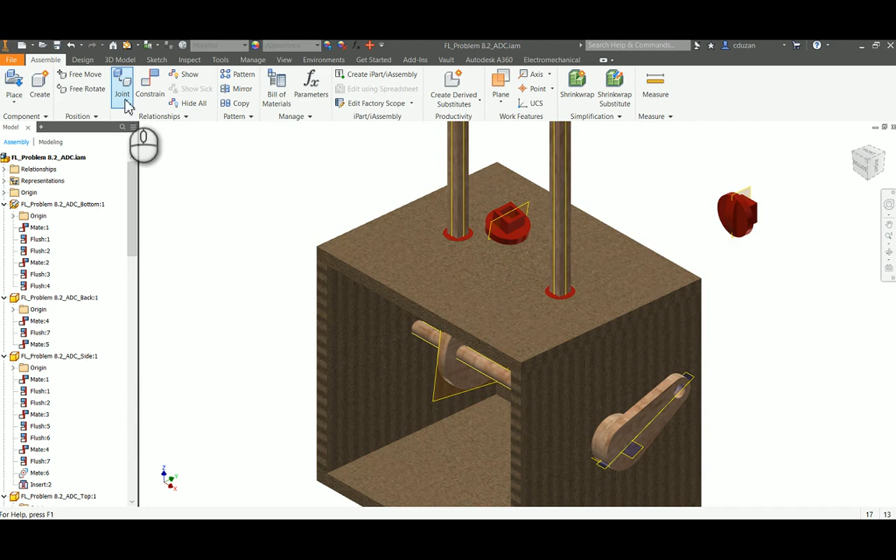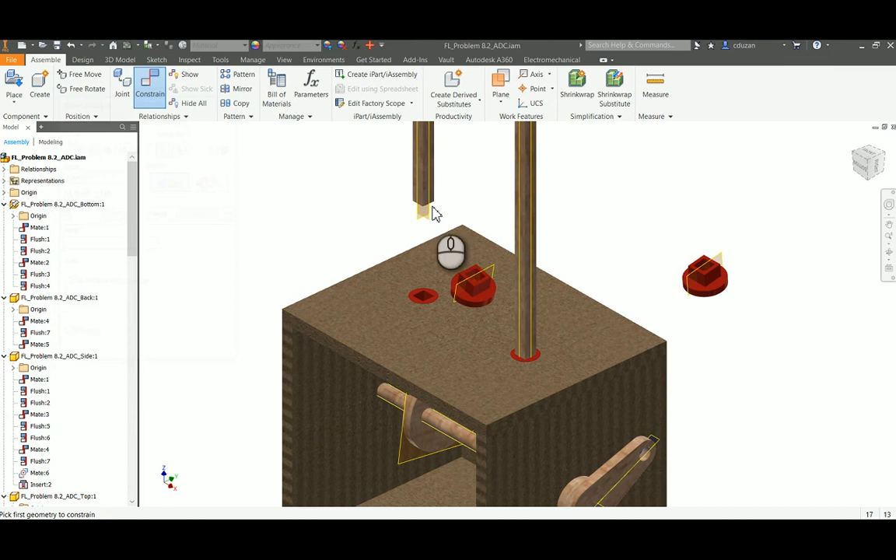Same thing here. Free rotate. Grab that part, use free orbit, sort of nudge that in the right direction, maybe with a constrained orbit at the end. All right, cool. So what we have to do is get that onto the bottom of the follower rod. Remember, this is not reality. We can do things like pull the follower rod all the way up, constrain this guy first, and then slide it through, and it will kind of ghost through that wall.

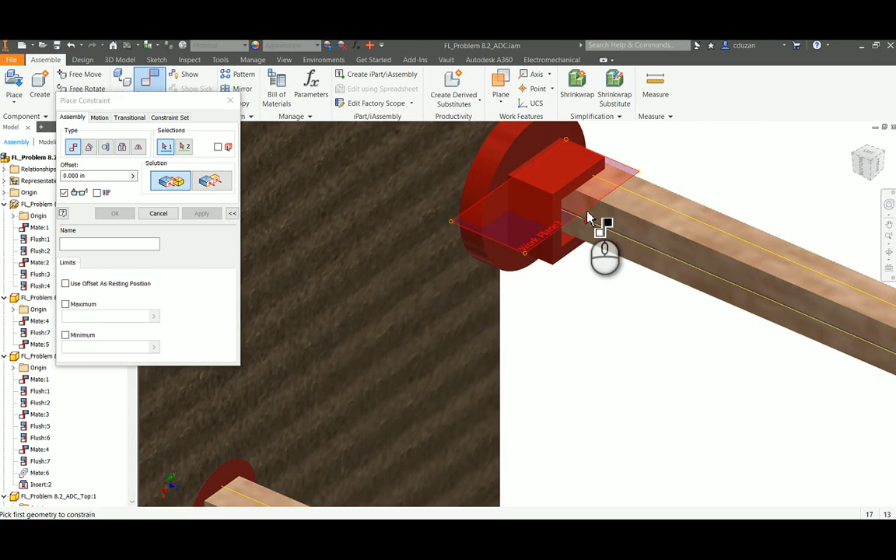So let's go ahead and constrain it. The first thing is I'm going to come out here and mate the bottom of that face with the bottom of my follower rod. Go ahead and hit Apply. And now I can constrain this face to this face. Hit Apply, and I can constrain this face to this face and hit Apply.

So kind of looks like Cupid's arrow. This guy is fully constrained, not rotating, nothing silly. Now check this out. We can push that through, make that ghost all the way through, comes through to the bottom of that face, and now he's sitting right on top of that cam. Pretty cool, right? All right, so we're going to repeat the same process.

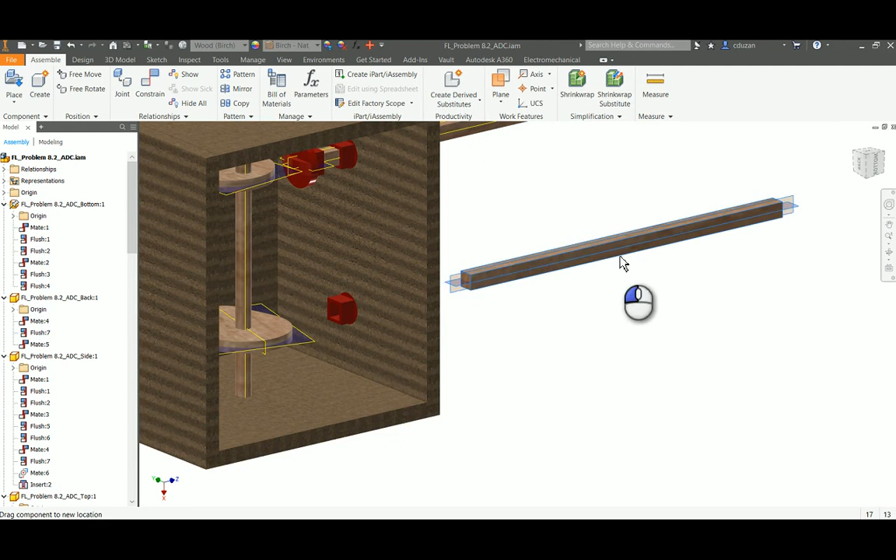I'm going to pull the follower rod out, give myself some room, okay, and now I can go ahead and begin constraining this base. I'm going to go to the bottom face here. Go ahead and hit apply. Okay, and now I'm going to go ahead and mate that face with this face and hit apply. Remember, if you need some more room, you can always pull it out.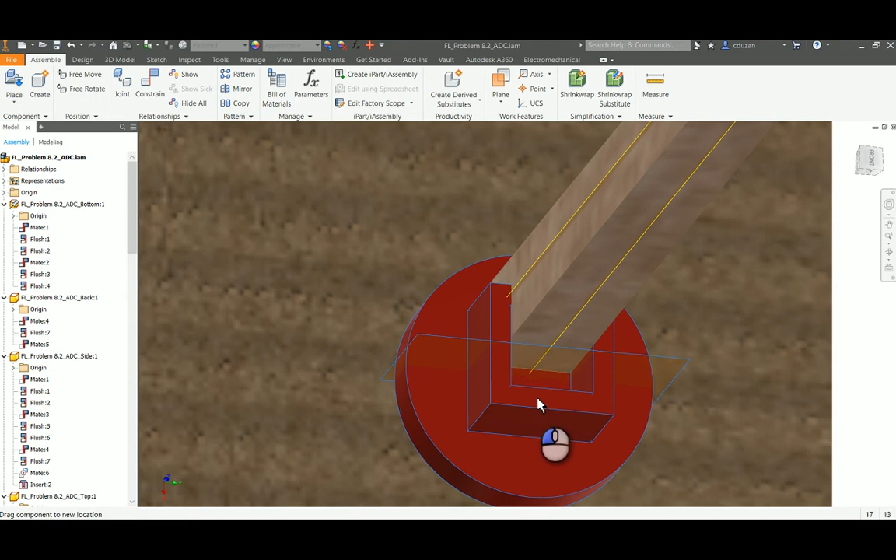Okay, constraint again. I'm going to mate this face with this face and hit apply. All right, so this is all going to be working together as a team. Okay, and we can go ahead and just shove that down through that face, flip it around to the back side of it, and now we can see that that is right on top of our cam. All right, so since we're all in a twisted mess here, let's just go ahead and go to home view, pull this back, and now is where our transitional constraints are going to have to come in.

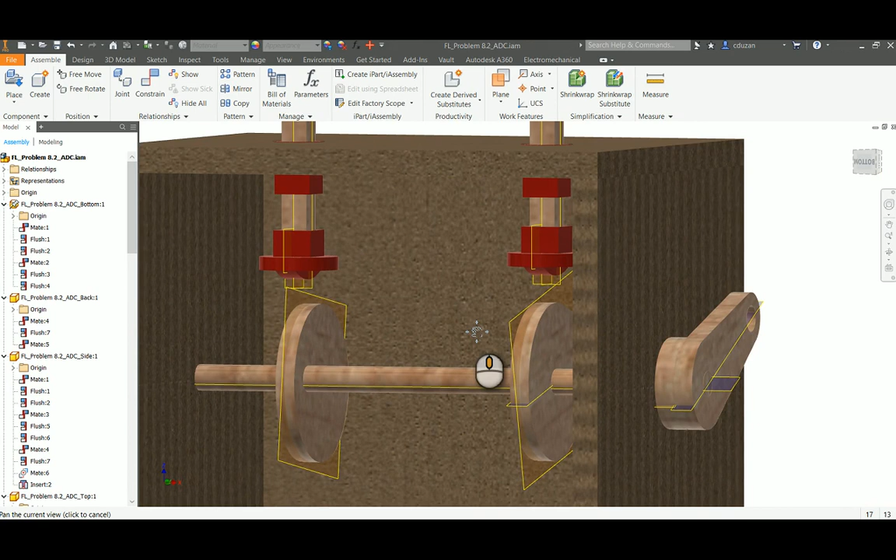We're going to go to constraint, go to transitional constraints. We're going to pick the bottom of that base first, and we're going to say, hey, we want there to be a transitional constraint between that face and this face here. Go ahead and hit apply, and we can cancel out. All right, so one last one. Okay, we have our pear cam. We're going to go to transitional constraint and say I want this face to be making contact with this face. We can go ahead and hit apply.

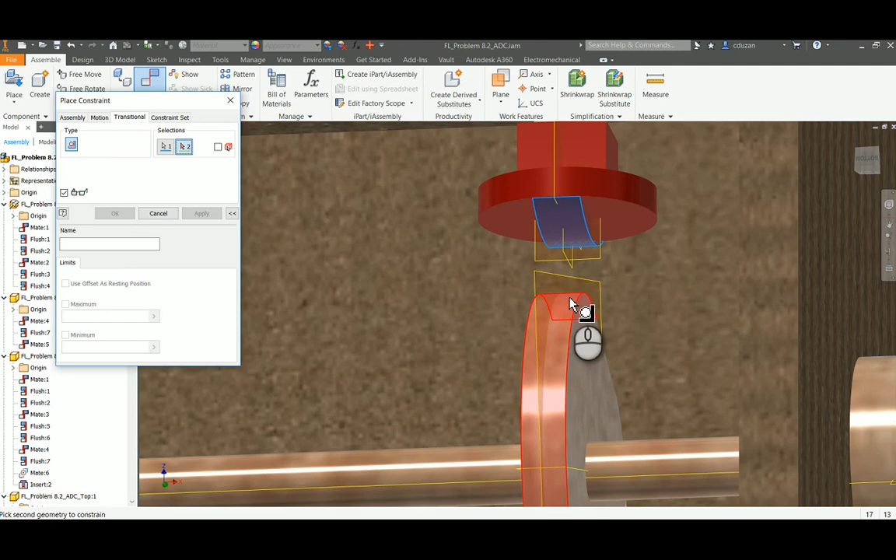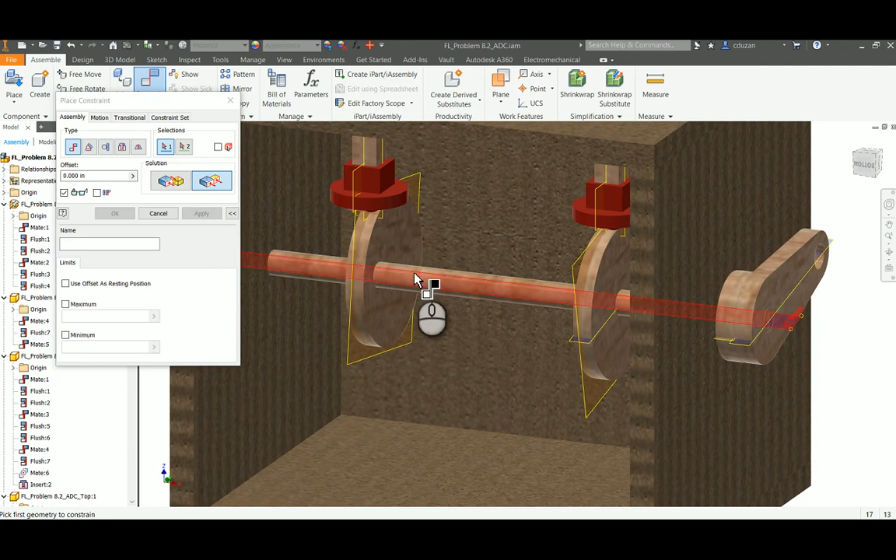All right, let's see how our transitional constraints did this time. Okay, when I come out here, oh, I forgot to do one thing. Oops. All right, let's do one or two more sets of constraints, and let's get these cams where they need to be. I'm going to go to constraint, go to flush constraint between this work plane and this work plane, hit apply, and I'm also going to come out here, and it looks like I'm missing a work plane.

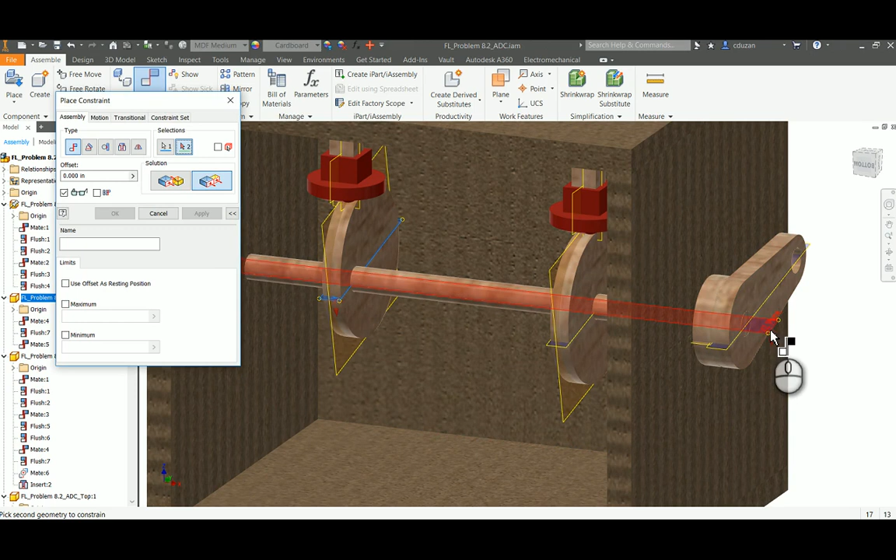So I'm going to go into my IPT, and I'm going to turn that work plane on. There we go. Let's return back to our assembly. All right, here we go. So now we can come out here and take a look. Okay, we can see that that face is blue, that face is blue. I'm going to say I want this face to be flush to this face. Let's apply that. Now let's cancel out, and now let's try our crank handle. Hey, it looks pretty good. Working really good. Okay, so transitional constraints are working.

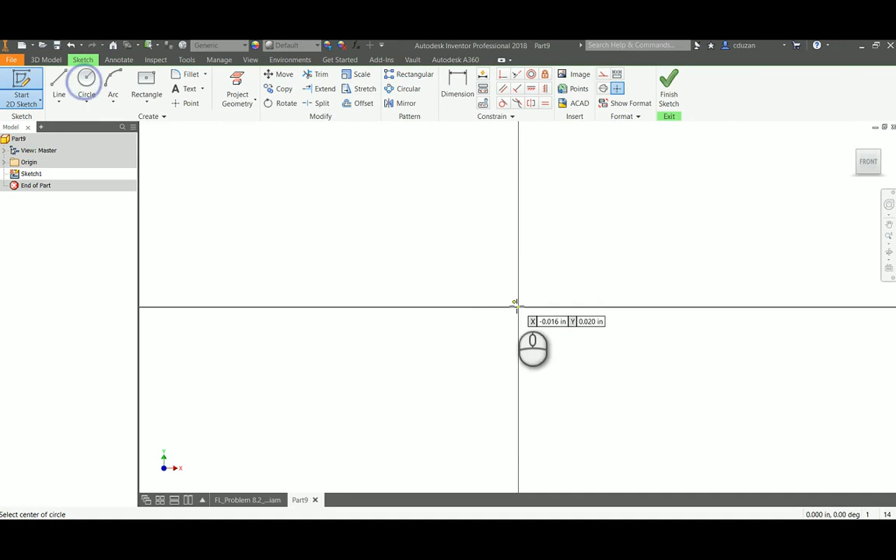Okay, so just sort of the icing on the cake is we need one more peg to drop in for our crank handle. That can just be a quick IPT creation. Okay, and if I remember right, I believe that hole that's in that crank handle is the same as the dowel for our axle, so we can dimension that. And that needs to be 0.25. A matter of finishing the sketch, doing an extrusion. And I think an inch will be fine. Maybe an inch and a quarter.

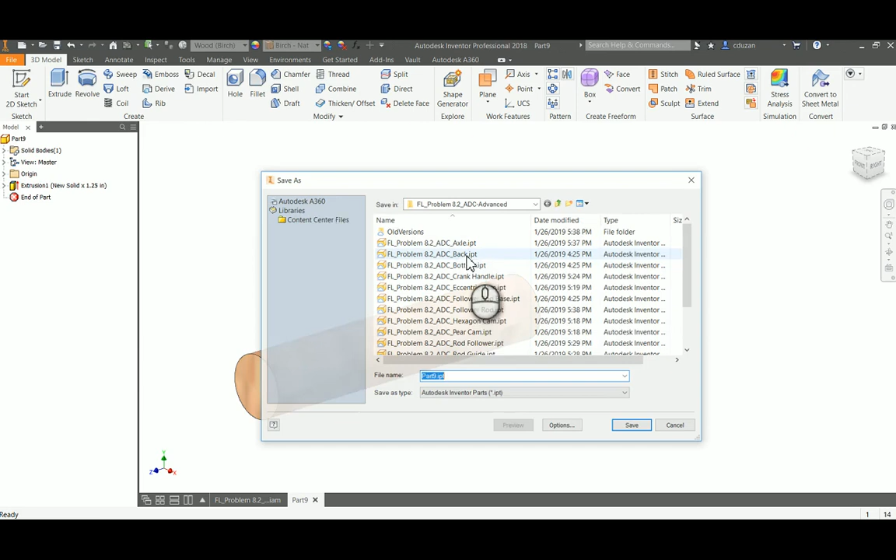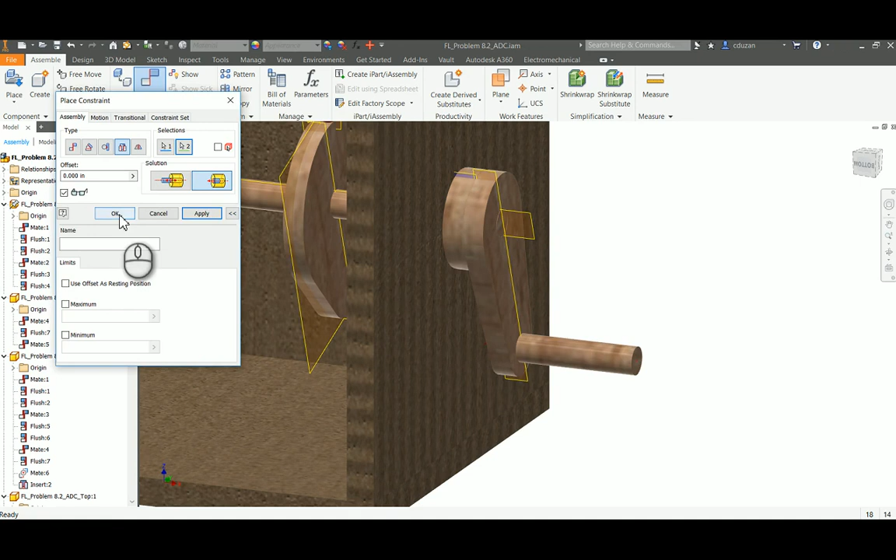Say OK, go up here, turn this into wood birch. Do a save as, and we're going to call this our crank handle peg. We're going to do a save. All right, so we can close out the IPT now that that is created. Now we can go out there and place our crank handle peg. Drop that into our assembly, and this time let's constrain that using the insert constraint, saying this edge needs to be lined up to this edge. That's the wrong solution. Flip it around, say OK, apply and cancel, and we are good to go.

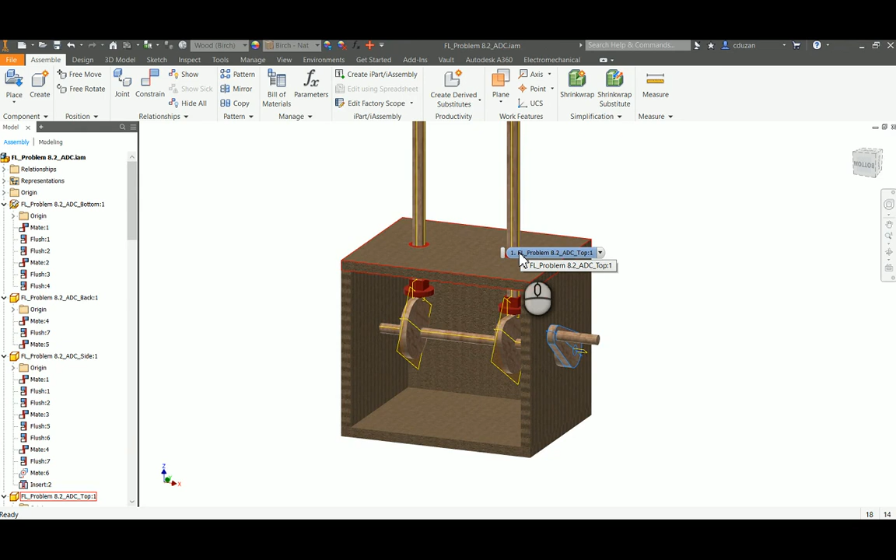All right, so there you go. So this is a little bit more advanced than what we were seeing earlier. But what is kind of cool with this is now we don't have to worry about our follower rods spinning, unless you want them to spin, of course, in which case you can offset the cam on that. There you go. We've got some 3D printed parts, maybe some laser cut parts. This might be looking a little bit more like what we're actually using in our actual session, some of the parts we're handing out. So the main reason on this one is we're just getting rid of that big obnoxious square dowel for the axle and replacing that with a 1/4 inch round dowel, and it's going to be much, much smoother.